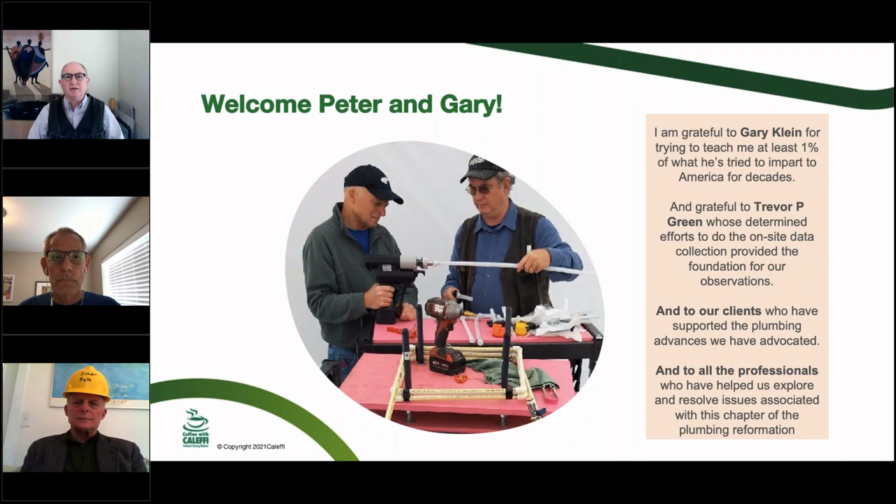Yeah, thanks for joining us with this and putting this together. I know it was a bit of work to squeeze it down into an hour, and we've got a lot to put in there. So here you go. You mean we don't have a day? This isn't an all-day presentation? Did I miss that memo?

Well, I'll start at the beginning, and the way we're going to do this is Gary and I talk almost every day for long periods of time. My partner says he's my new boyfriend, but anyway, we did start at the beginning about 2 years ago, when I finished my first, what can I call it, kind of demonstration of what Gary's been talking about for 20 years. I happened to run into one of his presentations online, and it looked good to me.

He was talking about trunk and branch and twig. Well, I grew up in Vermont, so that all sounded really good because I used to tap trees and make maple syrup. I kind of like that, right? And I wanted to go small for my net zero clients, and he talked about home run 3/8 inch twigs, and I said, let's do it. The GC said, oh, all right. You crunched the numbers, I crunched the numbers. It looked like it would work, and we put it in, and it was a great success.

And this project went on. It's called Net Zero Village. There's now a new one that we're working on called Solara. And the design that Gary really pioneered, I actually put in practice, and it works just great. And it doesn't involve 2-inch pipes to carry 3 gallons of water. Our goal is really making the tenants happy, getting them that hot water fast, not wasting much of it, and keeping energy losses to a minimum.

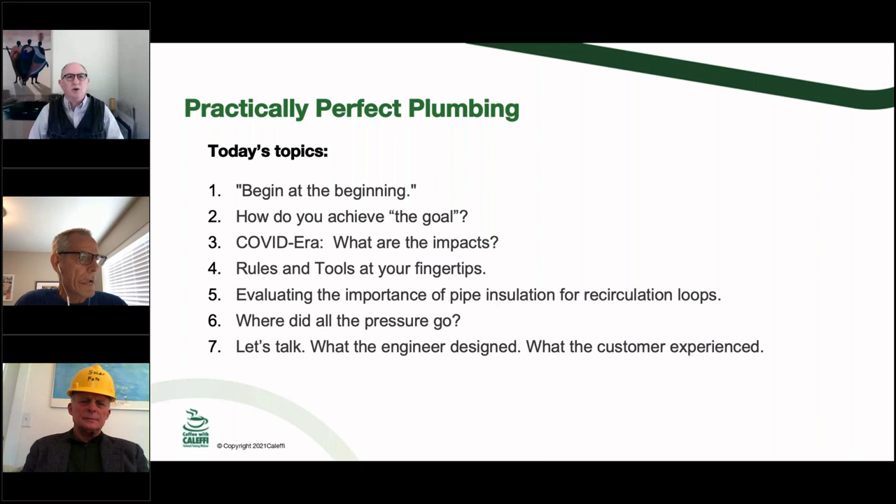Begin at the beginning. We've described here a process of thinking about how to rethink the way we do plumbing design. Pete was fortunate enough to not be steeped in code, but he started designing for Solara. He's an engineer, and he went back to first principles and said, let's just do the math and see what it says. Then he got an opportunity to look at real flow rates and figured out, why is there a 3-inch pipe in these buildings when I only see peak flows of a few gallons a minute? It made no sense. So we've been working on this process of how to think about plumbing together for a little over 1.5 years, almost 2 years now.

When I think about begin at the beginning, I actually want us to start our design work at the apartments, the fixtures in the apartments, and work backwards to the service entrance of the building. Because the tenants are who we're trying to provide hot and cold water for, not the building, not the mechanical room, but the tenants. So we're going to talk about our experiences looking at a few apartment buildings in upstate New York. Let's go on to the next thing.

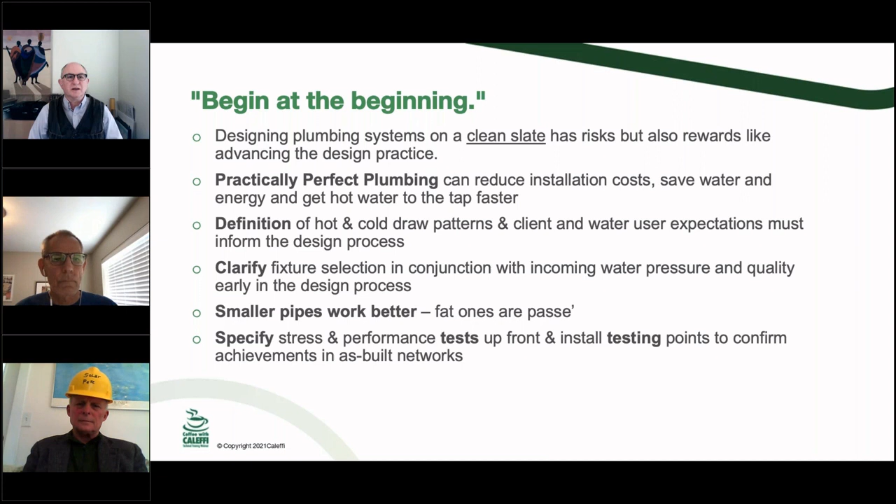One point I want to make, and you'll hear me talk over and over again, is when you're done, you really need to stress test the system. As Gary points out, what apartment did I go to for that stress test? I went to the last apartment on the trunk line, because if it doesn't work there, we got a problem. So we try to design for that last apartment on the trunk, and the rest is gravy if it works. I think our industry is starting to call that the most hydraulically remote apartment.

So on this one, what's the goal, Pete? What are we aiming for? Well, we want happy owners. That's really important - they pay us and they expect everything to work. They don't want to pay a lot for the installation if they can pay less. They don't want O&M problems. They don't want hot water complaints from the tenants, and they want clean water, because clean water means safe tenants.

What do the tenants want? They want hot water, always hot and free of contaminants. They want it to get there quick, and they want it to come out with enough pressure. Even those at the end of the network - us designers, well, we want happy clients. We don't want embarrassments with O&M problems, and we got to have safe water quality.

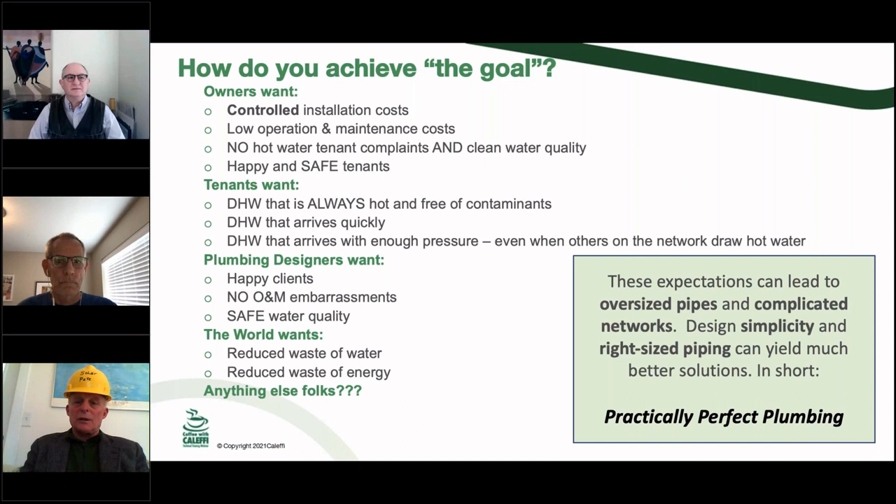So I look at this as a case of what we're aiming for: providing hot and cold water. Most of our talk today is going to be on the hot water side of things, because it's a lot more fun and interesting. But we're providing hot water to the tenants at their apartment, and they need somewhere between 15 and 25 gallons per person per day. Who knows the exact number? It varies all over the place, but it's somewhere in that ballpark. It's not 50 gallons per person per day - it's typically on the order of 15 to 25.

Pete's got some fun numbers to share with that. But everything else, getting the hot water to the fixtures in the apartments, is a loss.

You had a good point, Gary, during the practice. You said that they don't design buildings for plumbing. They put the mechanical room at the far end of the building, as far away as possible from that last fixture. They just don't think about that when an architect or designer designs a building - they don't think about the plumbing at all. That's exactly right. I actually think architects will lose their license if they put the mechanical room nearer the furthest fixtures.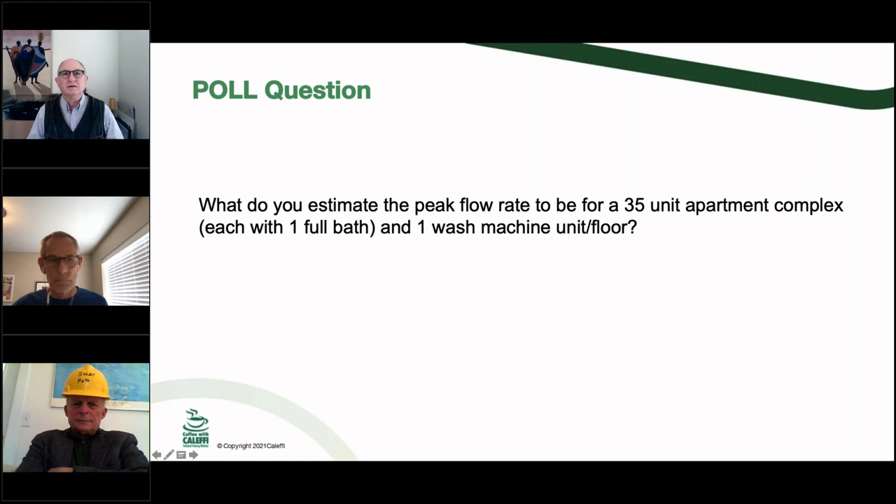That device really has been a godsend to me because I needed to build my solar thermal systems to match the load. Putting in too large a solar thermal system yields stagnation, breakdown, all kinds of O&M issues. So you want to right size your solar system, and the only way to do that is to figure out how much the load is, by measuring it.

Most plumbers can't afford a device like this, but one of my clients couldn't afford to pay me, and he had one of these lying around. So I got it, and it's been a godsend for the last 6, 7, 8 years.

All the data I collected suggested much lower flows than I later understood were predicted by what is called the water supply fixture unit approach. The codes talk about that. Gary's talked about that for decades as being outmoded.

And then we had John MacArthur kick our tires and make sure that we weren't completely out of our minds.

So here's some data that Hugh's Magic Box created in Building E, which is a phase 1 building at Meadows that they already built, senior housing. Take a look at these data. This is the hourly data. This is the maximum use, and we're really talking in gallons per minute.

Look at these numbers, folks. The black line is the average during that hour of the day. The dotted, or dashed, line is the maximum. Take a look at that, 1.75 gallons. Oh my gosh. And the blue line are the standard deviations. The maximum hour for this building was 106 gallons. Really, this isn't what the water supply fixture unit approach predicts.

Next one. So here on the left-hand side is the cumulative frequency analysis that my son Willie put together. Flow rate on the bottom, the frequency of its occurrence on the left-hand side. Hot water is the brown, cold water is the blue. I'm sorry, you can't see it down there, but the maximum we identified at Building E is 2.85 gallons per minute at a 99% return frequency.

That's only 3 gallons a minute for this particular site. And it was weeks of data.

That are represented there. I don't want to mix... the cold looks like it's only almost 5 gallons per minute in the 99th percentile. Yeah, I haven't studied cold.

The WSFU method is based on a 99th percentile calculation. That's what Hunter did way back when, and it formed the basis of all the math that we live with today. And what we're seeing here is that the 99th percentiles for cold are less than 5, and the hot is less than 3. Very low.

If you look in the lower right-hand corner at the histogram for one of our Solara buildings, that's at full occupancy, maybe 38 people living there, our maximum flow was 4.2. It's about the same number of tenants, fewer apartments, but a different group of people.

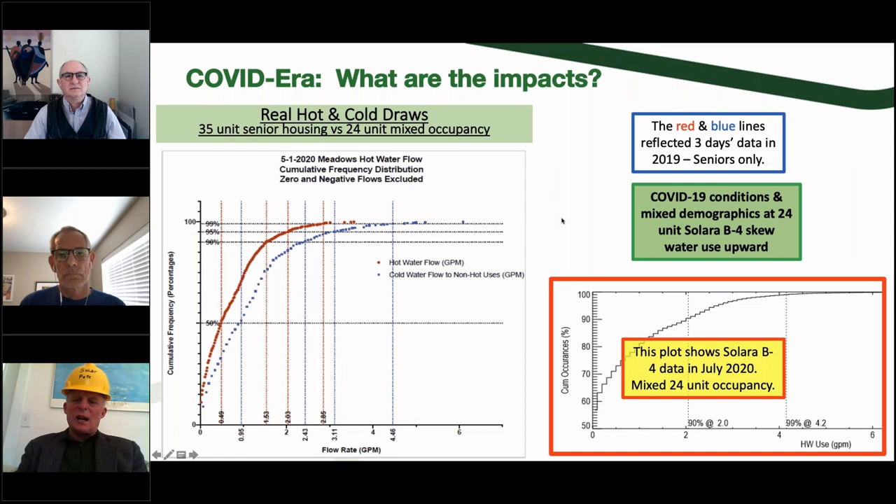And this is during the lockdown. People weren't going out. It's only 4 gallons a minute at 99%. This isn't a lot, and that's why our designs actually work. Go ahead, Gary. Yeah, so it turns out that the number of people matter, not the number of apartments, although one might be a predictor of the other.

So one of the issues is really knowing your occupancy. If you've got special requirements in an occupancy for filling up lots of bodies in an apartment building because of the tax implications of the way you build your building, then you have to plan for the number of people. But I'll give you a clue.

If there's only one bathroom, there's no simultaneity between bathrooms in your apartment. So yes, people drive the total volume, but the number of fixtures drives the potential for simultaneity.

So here's the original design for the buildings at Meadows. I think we'd like to call this the rib cage system. There's a spine of plumbing that runs up to the attic, and the third floor goes across the long corridor, and there's branches that come down past each of the mechanical closets on the first, second, and third floors, and then there's a common return based in the ceiling of the first floor. That's the blue line running down the middle.

There's a separate zone right above the mechanical room. There's 5 apartments on that side of the building, and they're served separately, in this case, off of basically a branch off of the initial trunk. So that's the basic design.

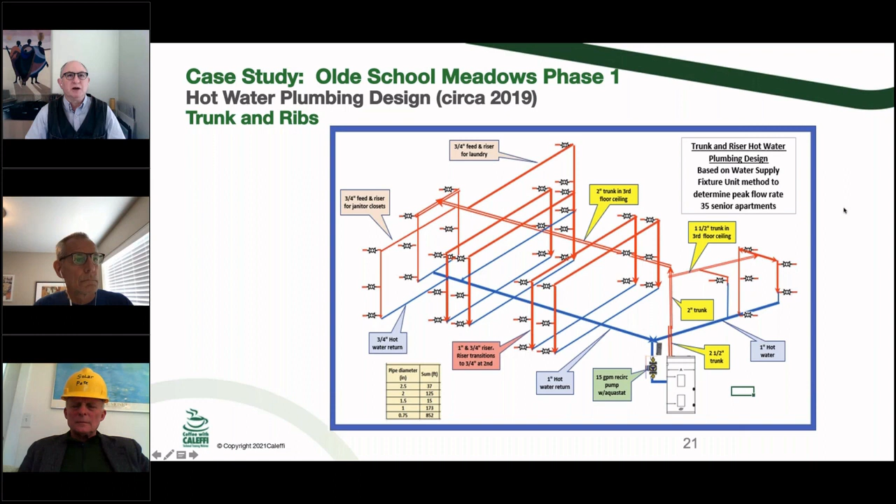And there's only one bathroom in each apartment. So there's only so much simultaneity that can happen, and it's much, much less than anyone would estimate. And the simultaneity carries through. If you're on a branch, you can be simultaneous with things on the branch, but not simultaneous with things on another branch. You just have to plan the plumbing accordingly.

So here's our design that we came up with.

We have still a long spine of plumbing, but we now have 2 separate zones, and each zone has its own pump. We got rid of all of the balancing valves and all of the difficulty of balancing. Sorry, Bob, we didn't need all that product from you, but there you go.

But we did use the Caleffi mixing valve because it had the capability of running correctly at the lowest flow rates we thought we'd have in this building, since we needed fairly small circulation pumps because we have such simple plumbing. So we have the main loop.

It goes out along the ceiling of the first floor up to the 3rd floor ceiling and comes back along the 3rd floor ceiling. Right there, just before it switches, that's the hydraulically most remote branches, those 2 apartments. Then the return begins and goes back down to the mechanical room. There's a completely separate zone for the 5 apartments above the mechanical room, and there's a small circulator pump on each of the 2 zones. That's how we structured the plumbing.

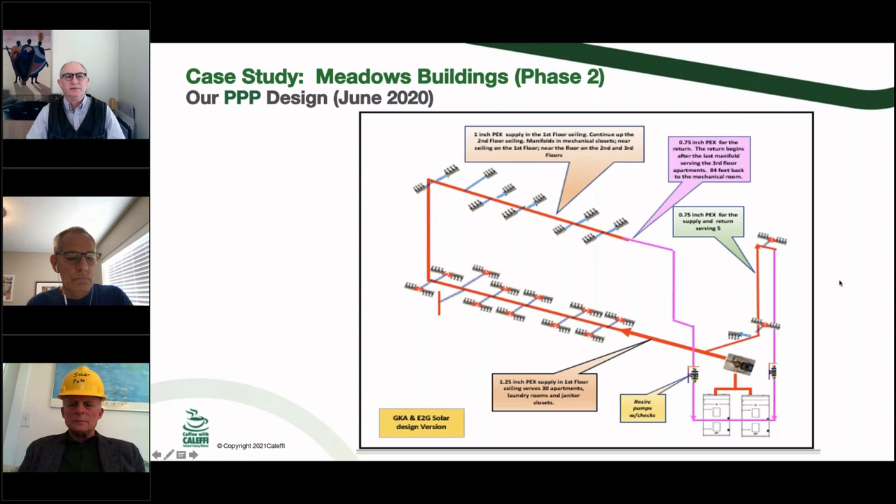Let's move on. There we go.

So I hope some of you have heard about the water demand calculator. It was developed by IAPMO as part of the WeStand process that they have been undergoing for half a dozen years now. It's used for estimating peak water demand for indoor residential use. It applies to single family dwellings, apartments, and multifamily dwellings.

You can download the calculator itself in Excel, and just this past week it became available for mobile devices. It's real slick. As you can see, there's a list of fixtures on the left, and a column that's probability in blue. The probabilities are worked out by the developers based on real data from real buildings and dwellings. Then you get to put in how many fixtures of what type you have and the peak flow rate, and you can't go higher than what the program allows.

It's designed for people who are building water efficient dwellings. It's not designed for old fixtures, but it works. Since Pete and I are working on projects with generally water efficient fixtures, it works fine.

So does this replace the Hunter's curve? I see the Hunter's number is still over here that you can put something in, or what? Oh, it actually calculates the Hunter's number. It's the exact same method that Hunter used back in the 20s and 30s and published in the 40s, with minor modifications, but it's essentially the Hunter's method.

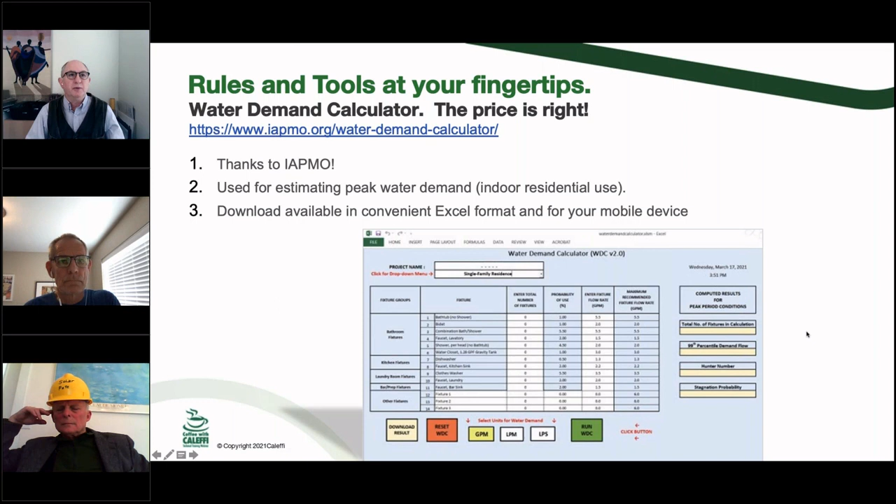It creates a different way of calculating the peak flow rate. Then you take the peak flow rate and go into the engineer's appendix in either the IPC or the UPC to determine the rest of the pipe sizing. So instead of using WSFUs and counting them and looking up a table that says how many WSFUs equal how many gallons per minute, you get to the gallons per minute using real flow rates and realistic probabilities for modern fixtures found in our buildings. It gives us a much closer to reality number than we find in the WSFU methods in either of the codes. It's pretty slick.

We used this when it came out, and you'll see it in this slide. Here's an example of a couple of different buildings in different parts of the country to see what it does. The buildings we worked on are in Utica, and I worked on a project in Seattle, and we'll show the comparison. You can see the number of units, the number of bathrooms, the number of clothes washers, and we used all of that in the calculation.

Seattle's based on the Uniform Plumbing Code. Utica is based on the International Plumbing Code. Appendix A or E allow you to do the calculations straight up, fixture by fixture, doing your WSFU count accordingly. Both the IPC and UPC have a bathroom groups modifier you can take into account. So let's stay with Utica: Appendix A says you need 80 gallons a minute, requiring a 3-inch pipe coming into the building. That's what was built on the first three buildings on the Meadows site.

And if you take into account the bathroom groups, you get 70 gallons per minute, and you still need a 3-inch pipe. That's what the code says, and that's how the calculations were done for Meadows. So still a 3-inch pipe, somewhere between 70 and 80 gallons a minute is the expected peak flow rate.

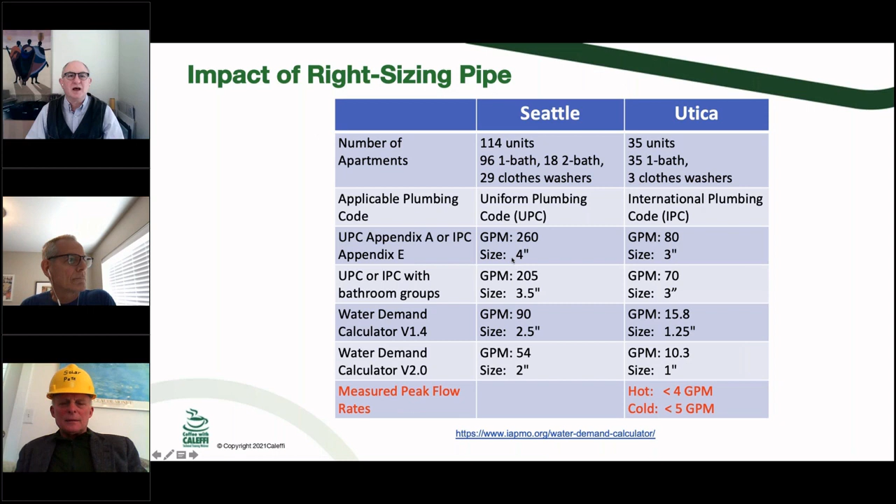What does it cost? Right? So this is for Meadows. Look, what we got rid of, all the fat pipe, right?

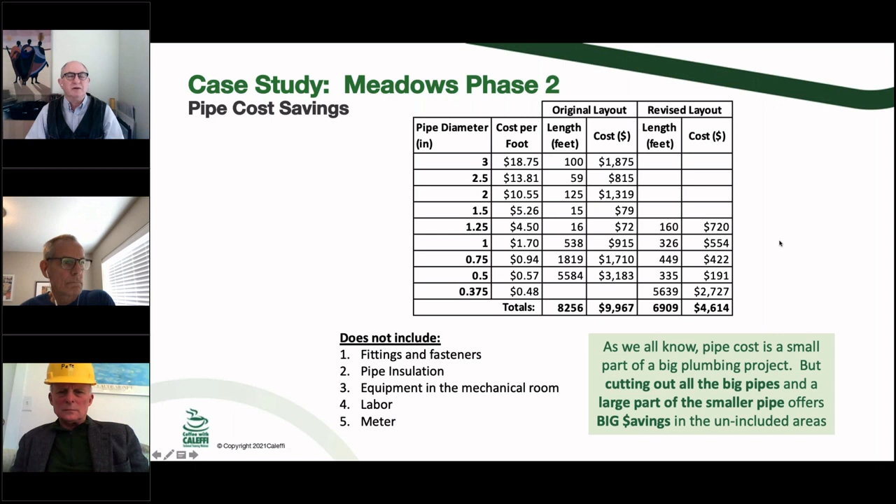Now, I know that people debate $5 up or down a lot, and we're talking about a huge difference in first cost, as well as running costs, right? Your meter charges are less per month because you have a smaller meter. So at a minimum, you save in the water costs. It's pretty amazing.

Okay, Pete, you take this one. Yeah, just to make Paul feel better and actually me to feel better, you know, we were talking about 35 apartments, and we wanted to make sure that actually on the main loop, we really only had 30 apartments, but I just wanted to make sure we weren't completely crazy.

And we put in pressure gauges along the way. We ran as much flow as we could get out of our pump through the unit, and by the way, much more than the 3-gallon maximum flow that we had measured in the earlier buildings. And the pressures were fine.

They met more or less what Gary had calculated. So I could go back to Paul and John and say, we mocked it up, we ran it, and it's running just fine.

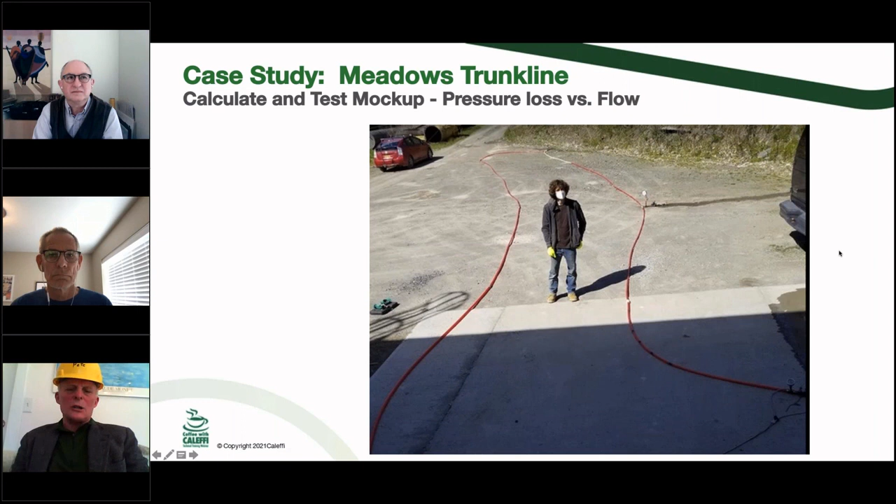And you don't have to worry that we're off our rockers, so to speak. We're practical engineering types. We like to make sure that it works. Theory's all well and good, but I want to see it function. And so we ran this experiment.

And in fact, Pete and Trevor are out there on the job, in the parking lot, taking measurements, and I'm the data logger recording the numbers that Trevor yells out over the phone. I'm in California, right? So we did it the old-fashioned way, brute forced, and just measured stuff.

Each apartment, according to the water demand calculator, ends up estimating a need for only about 3.5 gallons per minute, either hot or cold. We ran that on that last branch to stress test this thing. We assumed it's peaky, even though we doubt that to be true, and added flow rates across the rest of the system to increase the pressure drop, and everything still worked. We ran it up to close to what we expected the peak for the whole building to be, and as Pete has kept saying, we've never seen numbers get close to the 10 gallons a minute that part of the system is supposed to carry. Just never gotten that close.

So when we proposed home run twigs to fixtures, 3/8 inch diameter, that's where we started getting some pushback from the plumber. He really liked the trunk and branch approach: you go out with a half inch line, put in a T, and run separate runs to each fixture. I didn't know how to argue with him, he'd put in a lot more than I'd ever put in. But we agreed what we're going to do: we're going to have a PEX challenge.

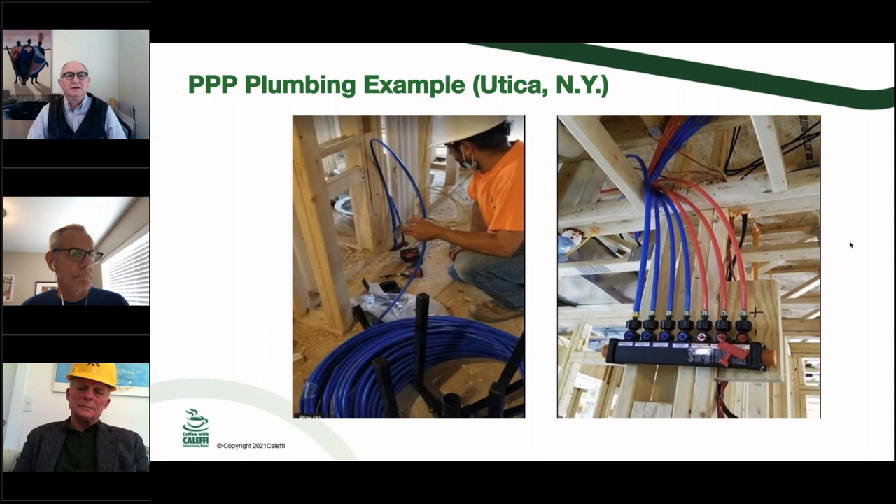Okay, so the next one is the pièce de résistance. This is what I did in January and February. I got in a car, drove from Albany out to Utica over and over as we resolved better protocols, got better measurements and tools, and evaluated some perplexing things we saw.

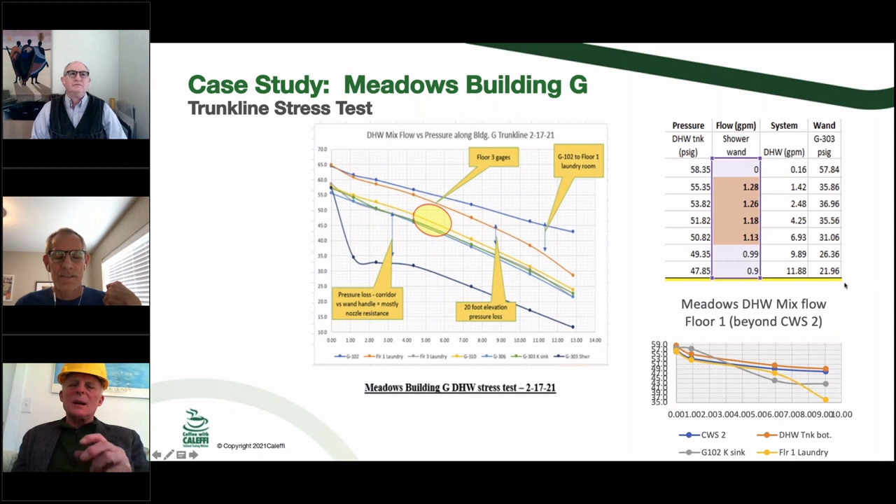Just as a point, when I first did building one at Solara, I thought I'd really covered the waterfront with all my mock-ups and testing. We turned on the water a day before tenants moved in, and the water coming out of the shower heads was terrible, wimpy, and everybody freaked out, saying it was all my fault because of the home run runs being too crazy. I said I did all the calculations. Well, come to find out, the problem wasn't in my stuff, it was in the shower valve I had nothing to do with. That was a mistake, I should have followed through and told the plumber to spec a different valve. It yielded a great outcome though, because Gary went out to Arcata and tested a whole bunch of shower valves, and guess what, the one at Solara was the worst one. We were able to finesse it with different pressure compensating discs, but boy, that was a hard day for me.

So we'll cover that when we get together on the pressure talk sometime soon, Bob. Yeah.

I argue that for a sink, people are really happy to have the water start getting warm. That's a satisfied tenant. It's nice and warm when rinsing a dish, but when rinsing their hands, if it's warm at all, they're happy.

And this is a first draw for the apartment. It gets there real quick if it's a second draw because the manifold is already warm. But Gary feels a little differently because he thinks the water ought to be warm, and he counts it from the time it gets to 100 degrees. But we're running out of time to argue about these.

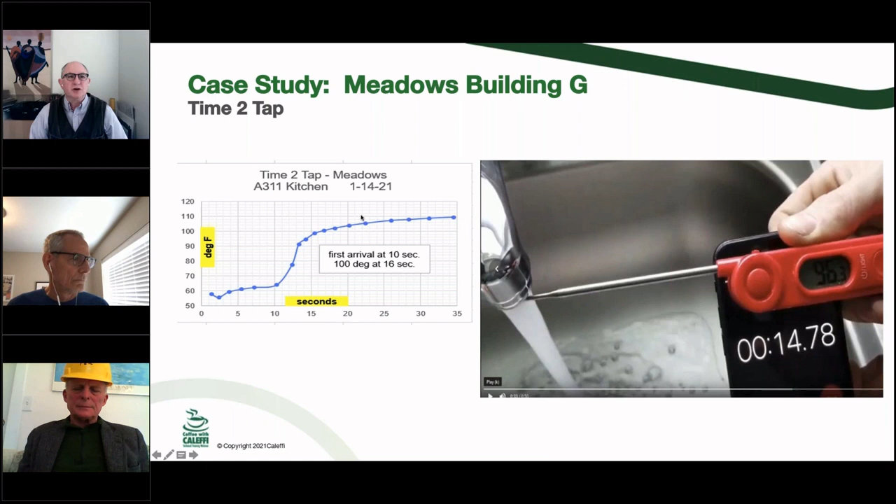It turns out that the first rise in temperature actually tells you the volume in the pipe. Our research done 20 years ago indicates clearly that it takes roughly 1.5 to 2.5 times the volume in the pipe before hot water, 105F or warmer, reaches the other end of that pipe. It's true for all the pipes we've measured, certainly true for all the small stuff. This graph is very indicative of what research has shown. It's great—theory and practice.

I love it, so I'm just going to say pipe insulation. Yeah, insulate, make sure the butt ends are taped or glued, because we lose so much heat out of any little hole. Part of the inspection I did during installation was to identify the actual installation of the insulation. But one problem was the sheetrockers were in a big hurry, and if the insulator didn't get there on time, there was a risk these wouldn't get insulated. So that's a really important thing the GC has to keep topmost in mind: get these insulated before the sheetrockers get there.

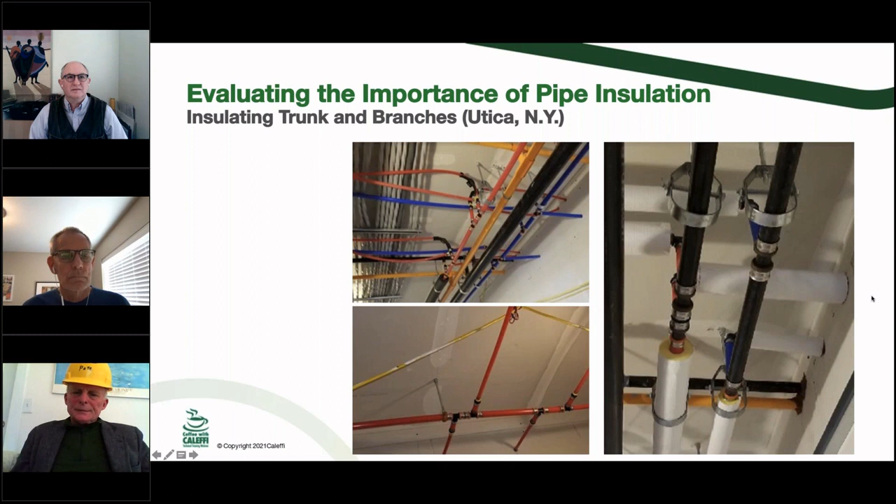It looks like a 1-inch wall on the hot line too. Yes, the specification by the builder and the code says you have to insulate all the hot water pipe. So Pete got to take his magic box out and measure one of the buildings built with the original design. We get the flow rate and the delta T running around the recirc loop, and we find out it's large—so large it turns out it was 50% bigger than the actual uses of hot water for the days we were measuring it.

Now, that's a lot bigger than anyone would estimate. We all talk about hot water recirc loop losses being 25, 30, 40% of the daily loads, meaning they're less than the uses, right? In this case, the losses were bigger than the uses by 50%. So we went back and did the calculation based on the design, and found out that it looks like those pipes might not actually have been insulated, which correlated with what we were seeing on the job site on the new buildings, where the sheetrocker was running ahead of the team.

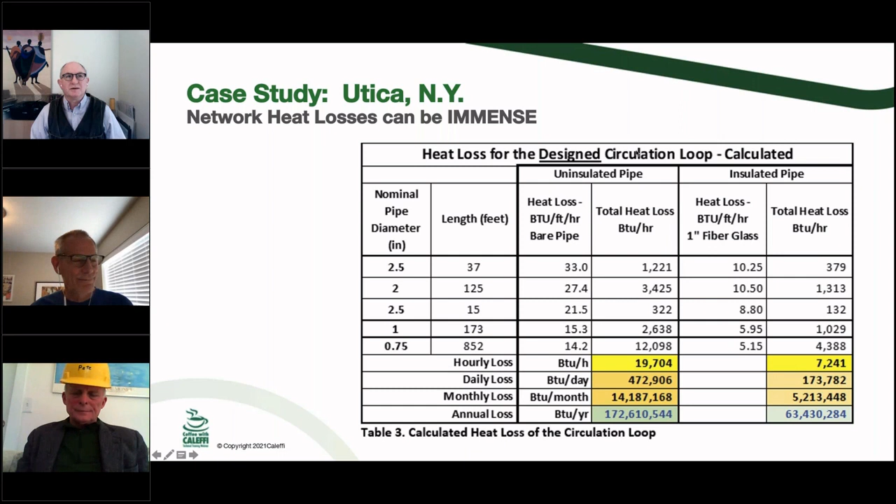That kind of problem persists in a lot of construction—you've got to decide what you're going to pay attention to. If you want your pipes insulated, you have to give the time and process to do it. If they'd insulated it, it would have used less than the uses, but in fact it currently used more. Also, the recirculation pump is a lot bigger when you have to move this many BTUs just through the pipe to keep up. Yes, it was a big pump, relatively speaking.

In order to close the gap of issues I wanted to make sure we had done right, I wanted to confirm it was in fact insulated. Over on the left, you'll see the mix-out temperature in blue—look at it go up and down, up and down. That's due to the Legio mix hunting for our set point. I found that really interesting, and thanks to Hot Rod, we had to move our temperature sensor further away to allow mixing to take place.

If you look here, we ended up on the main loop of continuous operation, with nobody else in the building, at roughly 1.86 degree difference going in and coming out, at 3 gallons a minute. We don't pump it that fast normally, but at 3 gallons a minute, that's all we lost. I crunched the numbers and came out with about 28 million BTUs per year. I was just delighted with that result.

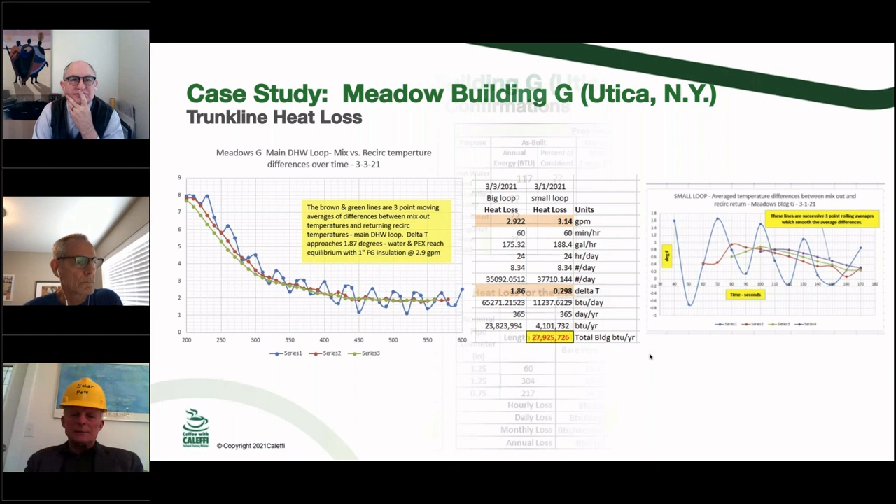We in fact predicted it. In the lower right-hand corner, you see 29,787,066 BTUs lost a year. So here we had real numbers matching estimated numbers. I felt really good about that.

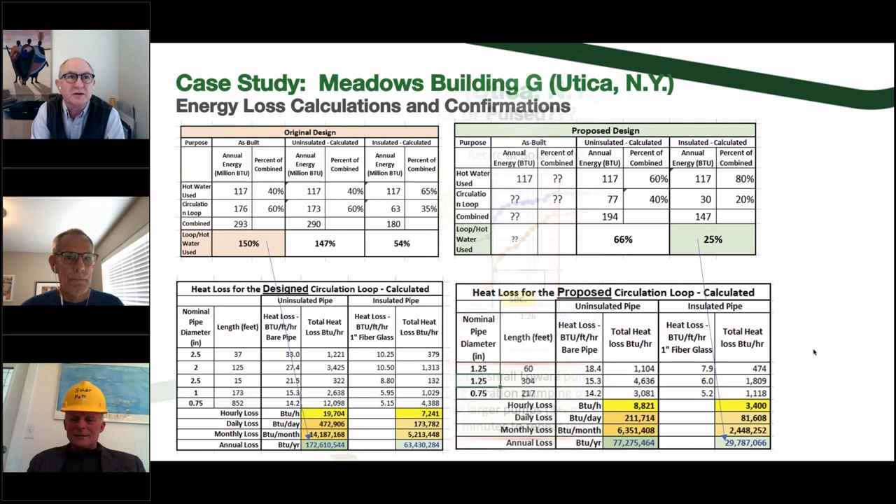And I'm convinced you've got to insulate the pipes. No, you're not supposed to, it's not allowed. Yes, you have to insulate the recirc loops, and you have to insulate the branches off the loops because they act like fins, they suck heat away from the loop.

One of the things that is very different between Meadows and Solara: at Solara, I was old school. I figured you put in like a 2 gallon, 3 gallon a minute pump, and you suck all the cooled water out and shut the pump off and let it cool down, and I guess 30 minutes later we turn it back on and do it again.

That's not what got spec'd at Meadows. At Meadows we have these Lowara pumps, adjustable with a little dial on the side. We found that the pump on the main loop was pumping only 0.55 gallon a minute, and the one at that 5-apartment loop was about 0.75 gallons a minute. So in order to keep that last apartment seeing warm water, a lot of the time that Lowara pump has got to keep going to feed the losses, even at a 1.86 degree difference.

So that might be another one: how should you pump recirc, low and slow, or should you pulse it? Or something in between.

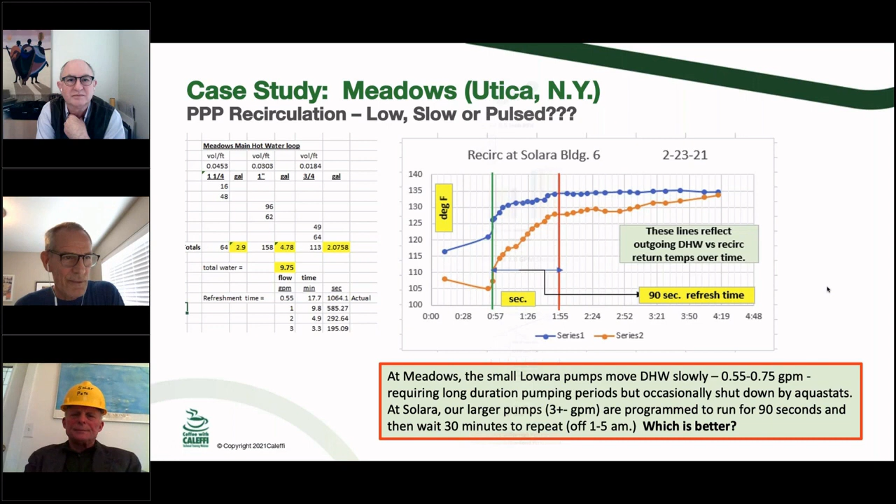It depends on the mixing valve too, because they have minimums where they need a minimum flow to be able to regulate accurately. That's why you went with the Legio mix, because you had that issue with the 1.25 inch valve spec'd in there, which needed 5 gallons a minute to perform properly. So by going with the small Legio mix with these low circuit recirculation flows, the valve works, which you showed on the first slide.

We're going to have a conversation in the future about where did all the pressure go. We have lots to share. You can see on the left that Pete and I have been measuring, in the picture - that's our lab up in Arcata. We actually have data now on 70 different combinations of pipe and fittings for 1/2 and 3/8 tubing with modern fittings. Copper is modern compared to what's in the tables - those tables are based on steel pipe with threaded and flange fittings, and I haven't seen that in domestic plumbing systems in like 50 or 60 years.

So we've got pressure drops in the pipe, and we've got some good stuff to show you about the pressure drop through different types of aerators, faucets and showers. As Pete mentioned, we've measured the pressure drop through a large number of shower valves that are sold at the price points put in multifamily buildings. We've got data to share in another presentation we'd like to do with you all at some point in the future.

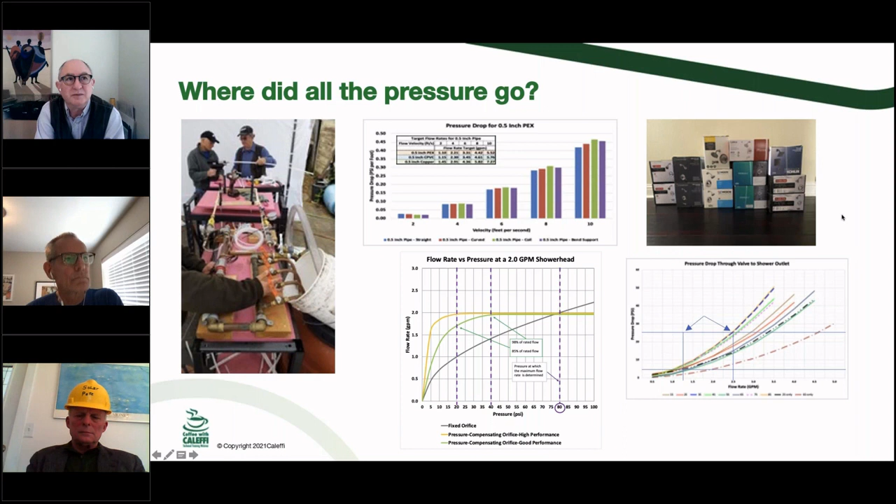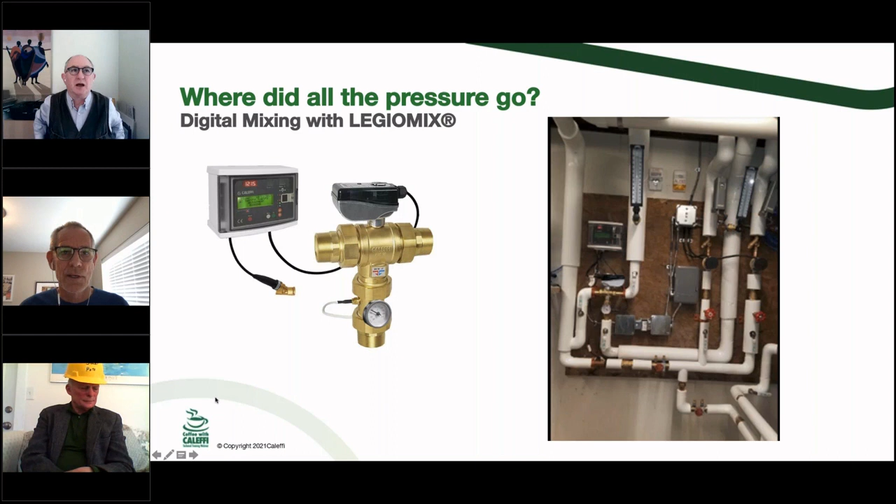One thing we were chatting about earlier is that the size of the LEGIOMIX is small relative to the pipe it's connected to. You want to size this valve by the flow rate, by the CV, and as you just learned through this entire presentation, the flow is a lot smaller than what you think it is. So even if the line size is 2-inch, you might get away with a 3/4 inch - I think you ended up with that on that building, didn't you? A 3/4. Our smallest LEGIOMIX was more than enough. I want you to give me a 1/2-inch one next time - I need a smaller one.

We're going to address why we lose so much pressure as we start pulling more flow through the valve - that fall-off pressure. It's a physics problem, not something we put in there on purpose to frustrate you. We'll show why the Caleffi is the best at reducing that fall-off pressure because of the design of the valve and the mechanism inside.

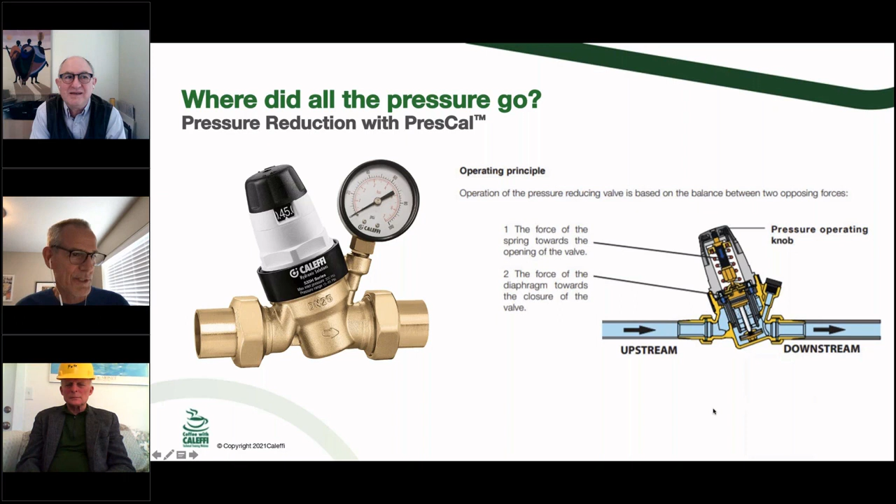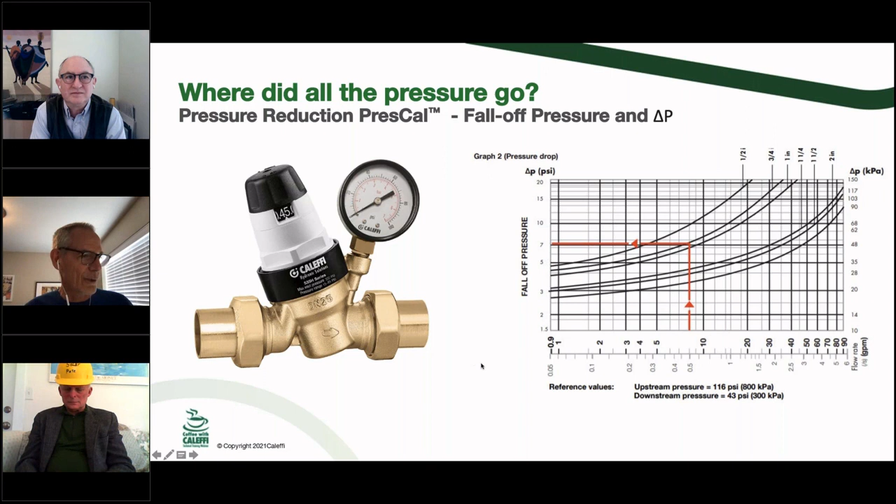It's all about fall-off pressure, and really this valve should be sized on how much you're willing to accept for fall-off pressure. We're showing here a 7 psi drop in pressure at about an 8 gallon a minute flow rate, compared to some competitors that drop off a lot as you go up in flow. It comes down to the design of the valve, and we do a good job of that.

So, let's wrap it up here. One of the questions we have to pay attention to: as an engineering team, we design something - we told you what we're aiming for, trying to have happy clients and happy customers of theirs. But what we design doesn't always get built. What gets built doesn't always get inspected and verified that it got built. And then you end up with customers that scream at you at 2 in the morning because they don't get hot enough water, and none of us look good in that process.

Or there's the hot water waste we just showed in BTUs per hour, day, or year, that someone pays for the privilege of buildings not done particularly well. And that recirc loss becomes an air conditioning load too - that matters more where I live than where you guys live, because we get summer all year and you get it half the year.

For the last point, I want to suggest we have to design our plumbing systems with the ability to put in equipment easily to allow for test and inspection - to confirm and verify it. The sooner we do that in our designs, the easier it will be for folks to come in after the fact. In fact, I build the data monitoring equipment into the bid as a requirement for part of the warranty, because if you can't see how the system is performing, none of us, from the beginning of the process to the end, know what actually happened.

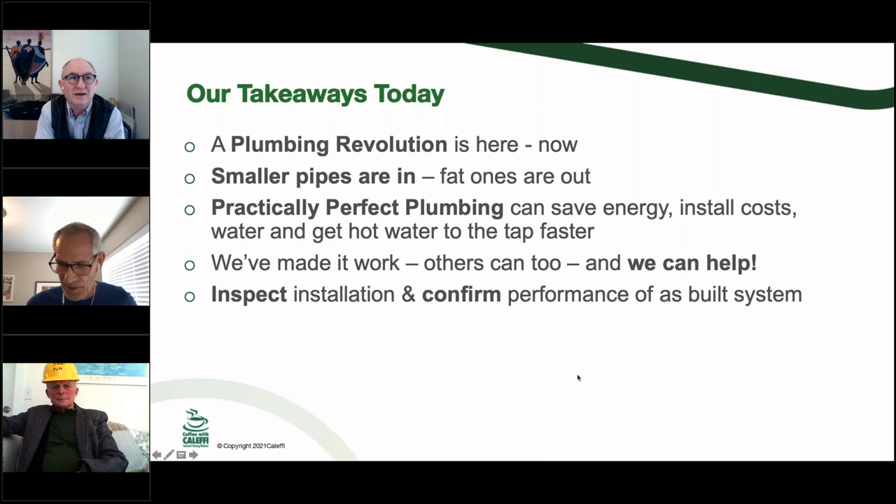If you're not testing, you're guessing, as they always say. So I really think we have to do it.

Thank you, Bob, this is great. Yeah, this has been great, and you timed it out pretty well there. I thought you guys were going to go a half hour long, so hats off to you. Hats off to Pete before the roof falls in on you there. That's our next one.

All right, so do we have any time for any questions? Did anything come in, or are we done for the day? Any good questions? I got Max right here, he's been monitoring questions. There's like 100 questions. Which one do you like there?

How can I convince my local code official to accept the water demand method? Local code officials and local unions have pushed back hard on the demand method, or anything other than what's in the book, basically. Sounds like Chicago asked that question. Union City, so. Yeah, no, I get it.

What we found is that by sharing the data with the inspector, with the engineering team, going out and measuring some flow rates in some real buildings will actually show them that the sizing methods are not crazy. It will be slow, look, we know that. We were very fortunate to have a willing client, a willing engineer, and a willing set of plumbers and inspectors. We got lucky. But the fastest way to the finish line is to not talk about the physics, but to demonstrate it with measurement.

It's way faster, way less painful. Everyone looks at the numbers and says, okay. Well, anybody that we didn't answer questions, we went through it, we'll certainly get back to. If we have to pass some of them on to Peter and Gary to answer the question properly or accurately, we'll certainly do that. We'll happily do it. It's part of the deal.